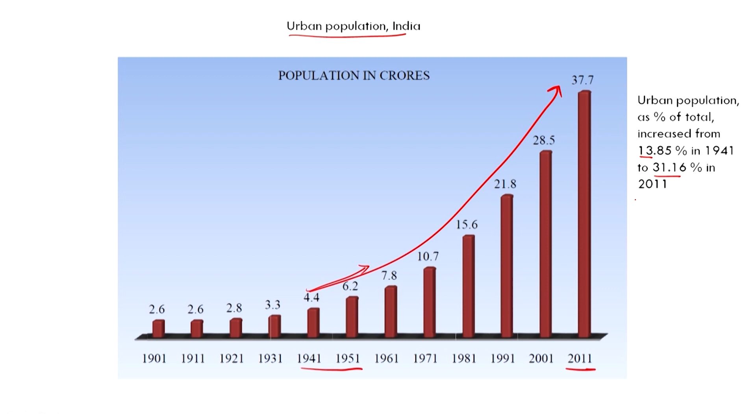So we see that it's a burgeoning urban population. Urban population as percentage of total increased from 13% to 31%. That's in 2011, and I think now in 2020 it will be much higher. As you can see, it's an exponential increase here.

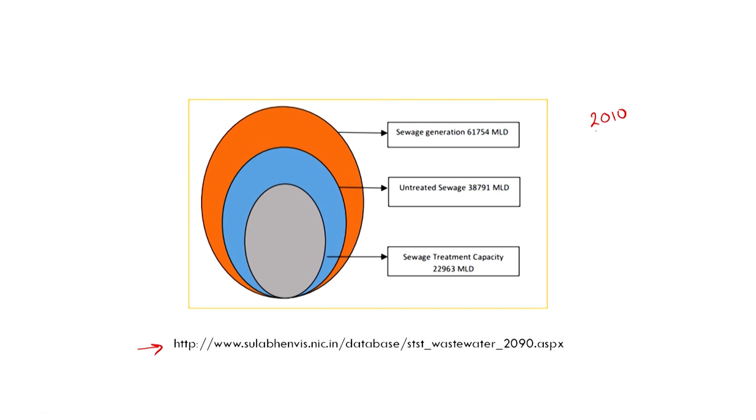Okay, let us look at the sewage characteristics. This is the relevant link, but I think this is from around 2010. So what do we have? Sewage generated is 61,000 MLD, or let us round it off, 62,000 million liters per day. And how much are we treating? We are only treating 23,000 million liters per day. Keep in mind this treatment is typically relatively poor.

Let us not go into the petty details now, but as you see, a huge percentage is not being treated, and obviously it is wreaking havoc with our water systems, both groundwater and surface water bodies. So that is what we have.

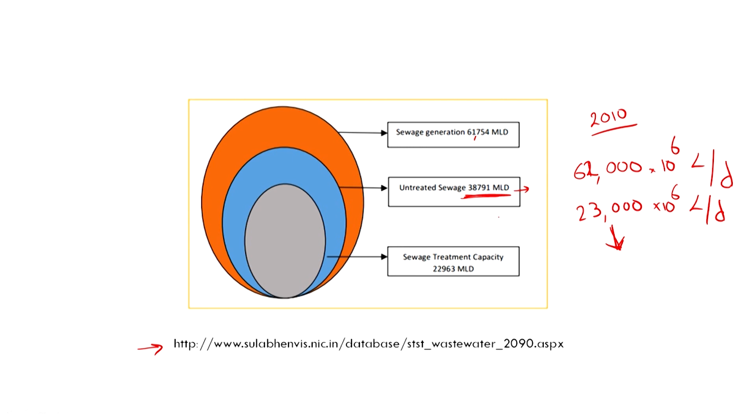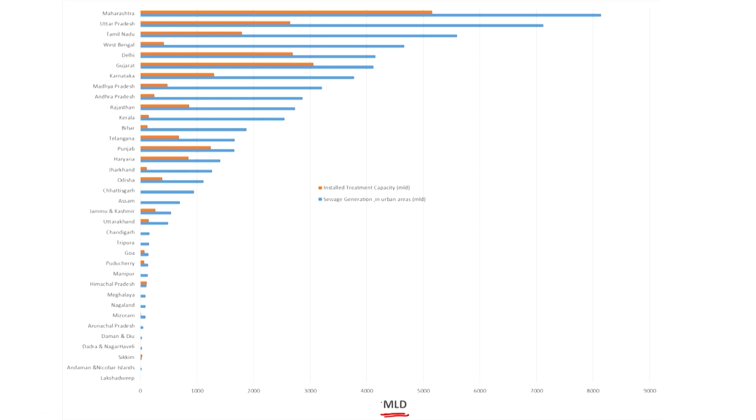Let us look at the bigger picture once. All this is from government data, I think late 2010 data, I do not have the latest data. We just played around with it in Excel. We have million liters per day on the x axis, and on the y axis different states, with respect to sewage generation and installed capacity.

Sewage generation: Maharashtra is generating a lot of sewage, relatively more wealthier population. I should have also had the population here, but though Uttar Pradesh is the most populous state in India, we see that it is the second highest producer of sewage. Keep in mind that the data here is not always reliable to a great extent, but you can capture the bigger picture.

But you can see that a greater level of sewage is being treated in Maharashtra compared to Uttar Pradesh, and we see the trends here with respect to Tamil Nadu and West Bengal, almost little to none. Delhi, maybe 70% or 80% is being treated, and Gujarat I guess relatively higher.

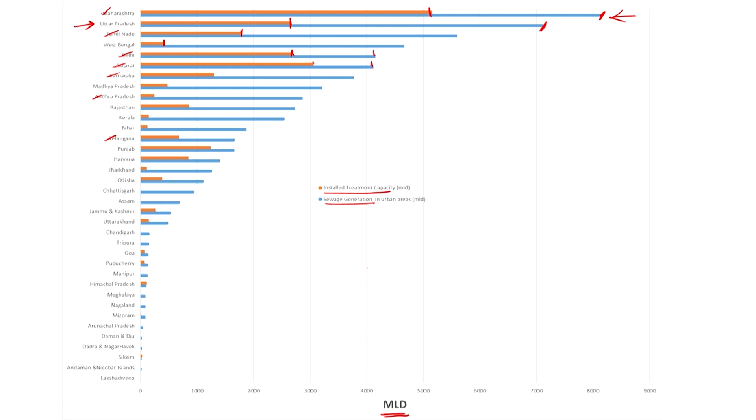But again the picture is that most of our sewage, even in those states that we think of as being relatively more developed, we see that the sewage treatment is pretty low, or sometimes it is abysmal. There are different issues, but we just want to get the bigger picture.

We do not have enough employment in the rural areas, so more and more people throng the urban areas where the infrastructure is heaving. So that is what we have out here.

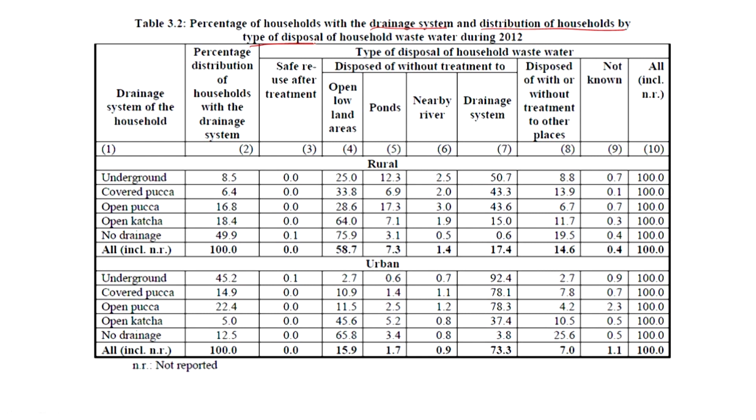And again government data with respect to households with drainage system and distribution of households by the type of disposal of wastewater. Just an overview: one is rural, and we see that 50% have no drainage. With respect to type of disposal of household wastewater, 58% is being sent into open lowland areas, and depending upon the concentration of BOD and COD, the groundwater, the soil and such will be polluted considerably. So that is something to keep in mind.

In urban areas, 45% is underground, and no drainage is relatively less. With respect to type of disposal, while there is a drainage system and it is not being disposed onto land, it is not clear to me whether it is being treated or not. So that is something to keep in mind.

But keep in mind that we are talking about percentages here, and the concentrations and the volumes are going to be remarkably high in the urban areas. Why I say this is we talk about river cleanups, and if you have no drainage collection systems or sewage collection systems in the first place, the sewerage system as we call it, and all this waste goes to the rivers or surface water bodies through multiple channels, you can't really treat the river.

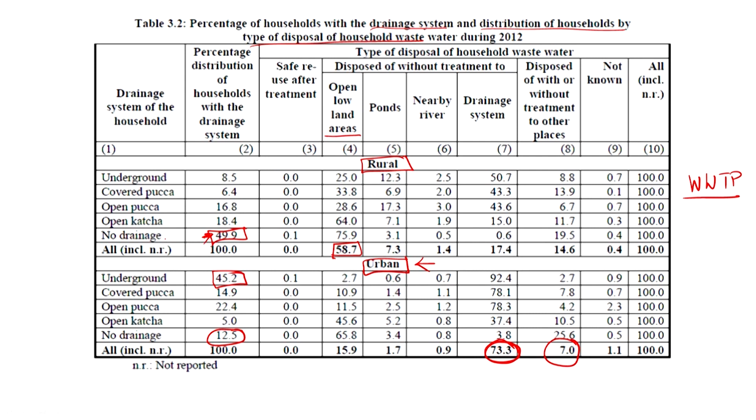So you have to have a collection system, and then a treatment plant, and then treat this water and discharge it. So now you understand the issues. One is not just the lack of wastewater treatment plants, but more importantly the lack of drainage facilities, or the sewerage system.

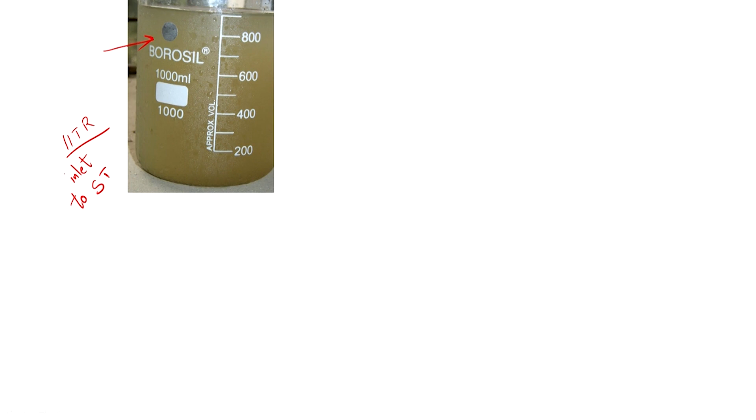And typical sewage, this is a picture of the inlet to the STP. STP means sewage treatment plant, and this is what we want to treat it to. From the background this is not from IIT Roorkee, but the one in Haridwar. We will look at the pictures from IIT Roorkee later. So this is what your untreated water looks like.

So what we want to do is prevent this. If you dump such organic load, DO is going to fall big time, and your BOD levels are going to be very high for quite a stretch. You do not want to have this level of ecological death out there.

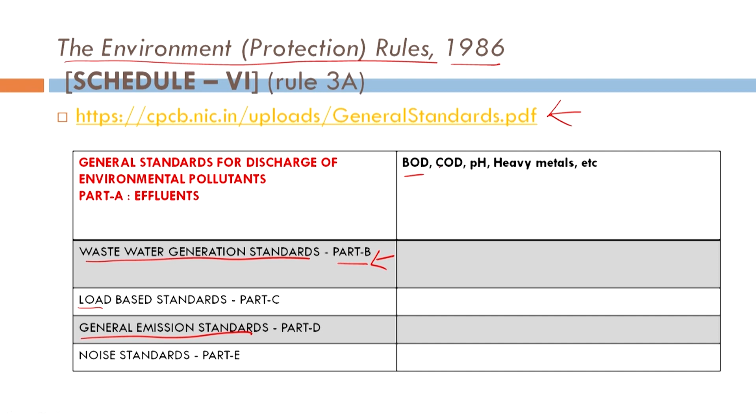So, let us see what we have. Typically we are concerned with the Environment Protection Rules of 1986, different amendments and such. So, I guess you can look at the general standards out here. So, what do we have? General standards are given for wastewater generation in part B, load based, general emission standards and noise standards and such. We are concerned with this. There are different standards for BOD, COD, pH, heavy metals and so on and so forth, which we will not look at, but you can, I guess.

So, wastewater contaminants, we are not going to look at X, Y, Z and let us say all the 10,000 or 30,000 compounds that we are concerned about, but we are generally concerned about some major aspects or variables, if I may say so. I am concerned about suspended solids. Suspended, as the name indicates, it is not dissolved, it is suspended in the solution, let us say. They can cause sludge deposits and anaerobic conditions in the environment.

So, for example, after some time they can settle down, right, and once they settle down, no access to oxygen, let us say in the interior parts, and so anaerobic conditions, putrid smells, and again with respect to pathogenic activity and such, right, and again no life typically that is useful to us anyway.

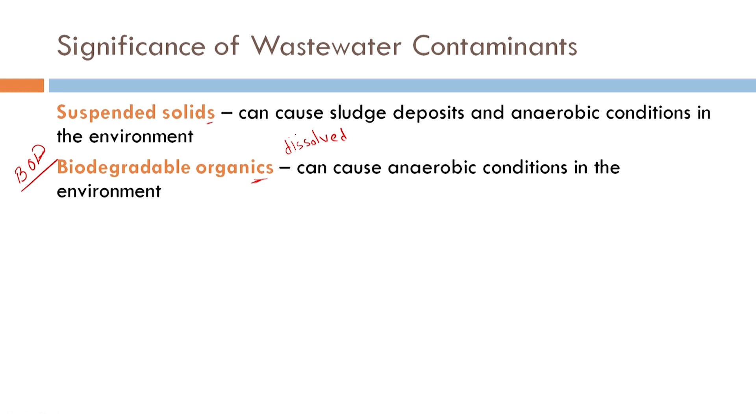And we also have biodegradable organics, which we are measuring by BOD, right. They can also cause anaerobic conditions in the environment. Biodegradable organics are present in suspended solids, but mostly in the dissolved form. What happens is that the microbes can degrade them in the presence of oxygen, thereby decreasing the oxygen levels.

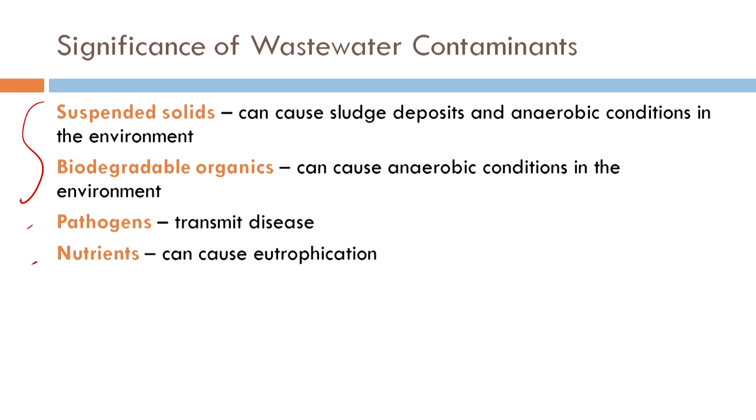So, you do not want to release that, and obviously pathogens from human feces or urine, and they obviously can cause diseases. And as we saw, I think 30% of infant deaths are due to such waterborne diseases, and nutrients which can cause eutrophication, right. So, hopefully now you understood why we talked about TDS and TSS, BOD, COD, fecal and total coliform, and nitrogen and phosphorus, because in wastewater these are the variables that we are trying to control, let us say, right.

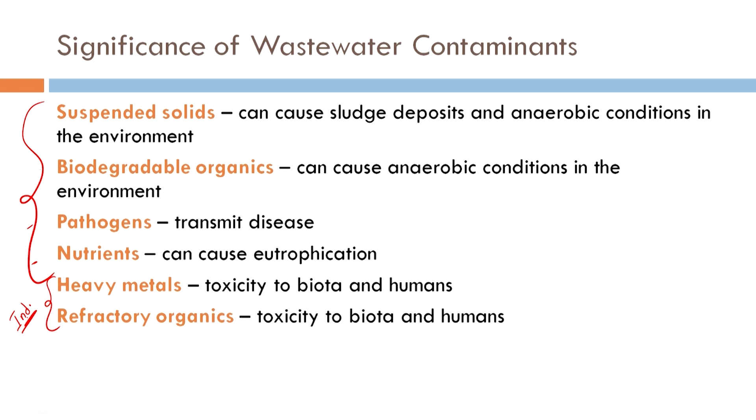Heavy metals, yes, but typically in sewage treatment plants we do not get that. Again, refractory organics and heavy metals are typically indicative of industrial activity or wastewater from industries, let us say, right. So, let us move on.

Characteristics of domestic wastewater. So, I am concerned with BOD, COD, suspended solids, total dissolved solids, and let us say nitrogen as N, and phosphorus. So, what do we have? Let us look at the medium value: BOD looks like around 200, COD is 500, but I would say it is a bit off. For domestic water, the ratio is typically more biodegradable. TDS around 500, and TKN, a measure of nitrogen, let us say 40, and phosphorus 10, which is relatively high out there.

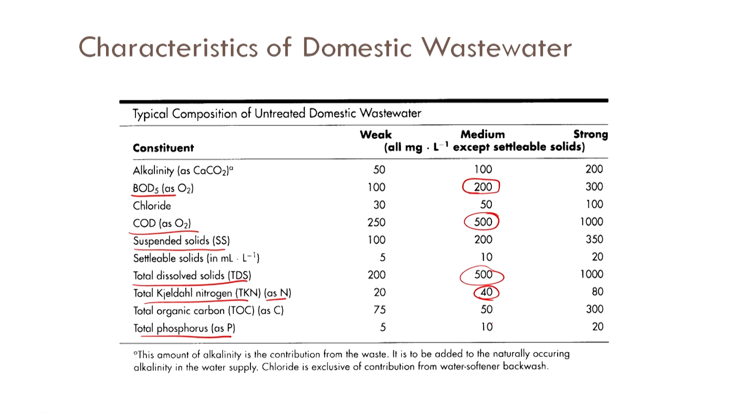Let us look at what it is at the inlet of the sewage treatment plant at IIT Roorkee. This is from 2019 as we see. So, pH again, once before the sewerage network, one after that. The issue is that before the sewerage network, you did not have a sewage collection system. So, your rainwater and such comes and mixes, you have dilution, you need to treat a larger volume of water, and also this water can go everywhere out there, right.

So, that is why you see that BOD when it was collected before 2016 was low, and when we had a sewerage network, and all the network now brings it to the STP, the sewage treatment plant, now we see a higher and more concentrated value, but the effective flow will be less, right.

So, that is one thing to keep in mind. It is not as if magically the BOD increased. So, 270 milligram per liter BOD, COD, suspended solids around 250, TDS we do not have data from this time, nitrogen, NH4 and NO3 minus, ammonia and nitrate, and phosphorus, and fecal coliform, I guess it is at that level. But what do we need to treat it to?

So, we need to bring it down to less than 10 BOD and less than 50 for COD. For nitrogen, I am not sure why I do not have the data, but for total nitrogen I guess it is 10, and phosphorus, as you see, we have to bring it down to 2, otherwise we are going to lead to eutrophication. And from a high of around 1 lakh, we want to bring the fecal coliform down to 100. So, that is what we have out here.

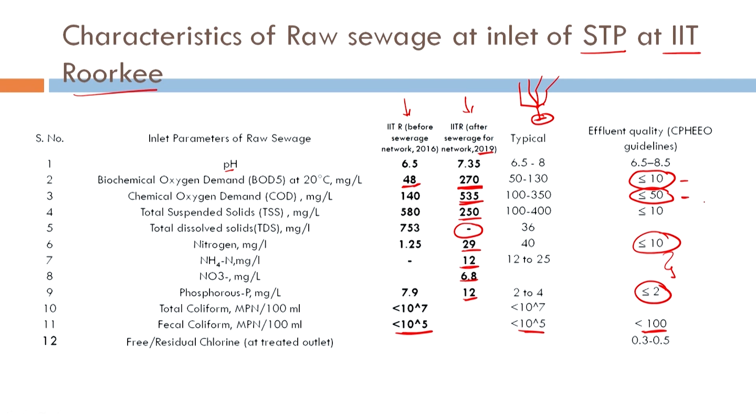Keep in mind that we want to achieve 10 BOD and 50 COD and around single digits of nitrogen and phosphorus. And typically in India, what do we have? We have septic systems which are disposal on site. Because we do not have a sewerage network or a centralized wastewater treatment system, on site disposal is required, and septic systems are most common now. They should be engineered, but they are not. Typically they are based on passed down knowledge.

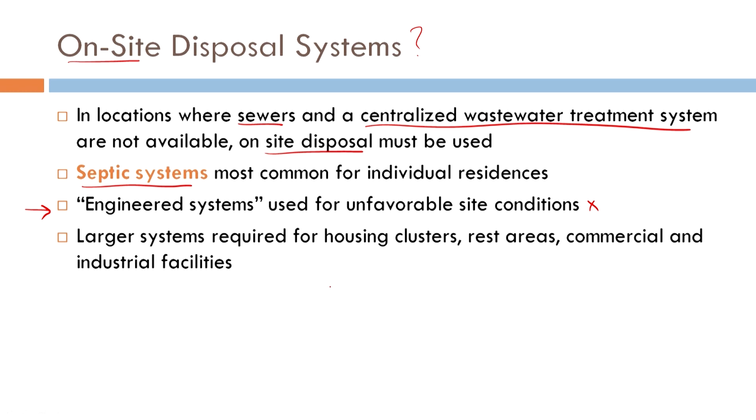Let us look at a typical system. Your wastewater is collected into your septic system, where it is treated anaerobically, because we are not providing any source of oxygen, as you can see here. And then the partially treated water will be distributed out here. But in India you do not have the space for this land. And this is let into drainage canals and such, again surface pollution and so on.

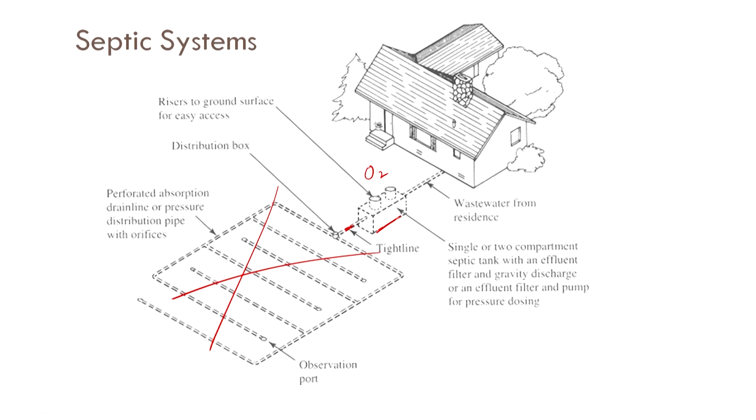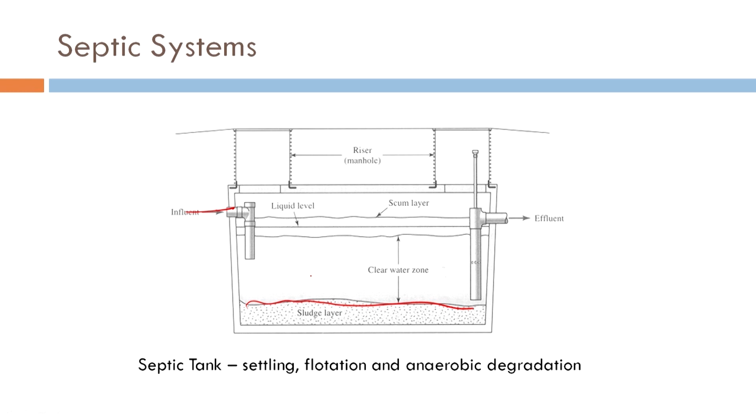You want to distribute it, it can be used for kitchen gardens, backyards and such, but we do not have the space in India. And with partially functioning septic tanks, we let out polluted wastewater into the environment. So, septic systems, what do you have? Influent, suspended solids settle down, relatively clear water, and then a scum layer at the top. What is happening here? We have settling, some flotation, and more importantly anaerobic digestion.

You have anaerobic bacteria, and the byproducts here are going to be methane or the reduced forms of carbon. And this is the reason we hear of deaths of people still engaged in manual scavenging. They go into manholes, the poor people, literally poor, because of historic issues, and they pass away. Why is that?

Anaerobic conditions persist in these septic systems. There will be no oxygen present, and you will have other gases which are toxic, like hydrogen sulfide, or methane, or other reduced forms of carbon. So, that is why you see people dying when they enter septic systems without proper breathing apparatus. So, let us move on.

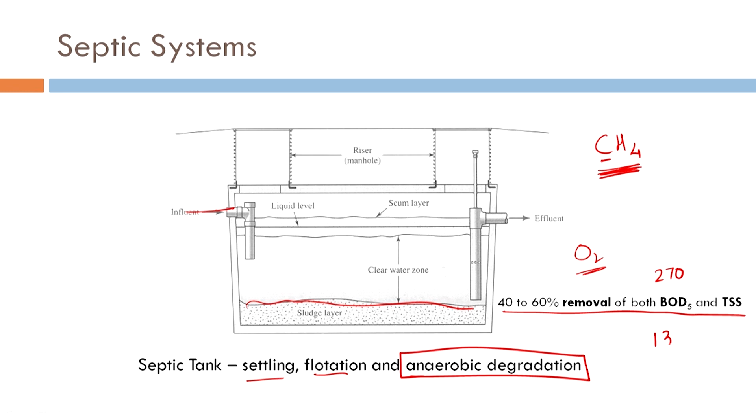Typically this is the issue: only 40 to 60% removal of BOD5 and TSS. For example, at 270, we are letting it out at 135 BOD, which is still remarkably high. That is something to keep in mind. So, if you have a centralized wastewater treatment plant, what are our contaminants of concern? Total suspended solids, dissolved organics in the form of BOD and COD, nitrogen and phosphorus, and then pathogens. For pathogens, you can either disinfect, or different processes will take care of them.

So, primary pre-treatment: people throw lots of stuff, glass water bottles, plastic and so on. You want pre-treatment to remove them. Bar racks, a grit chamber where you remove sand, and an equalization basin where you hold the wastewater for some time, so that the concentration in the outlet is relatively uniform.

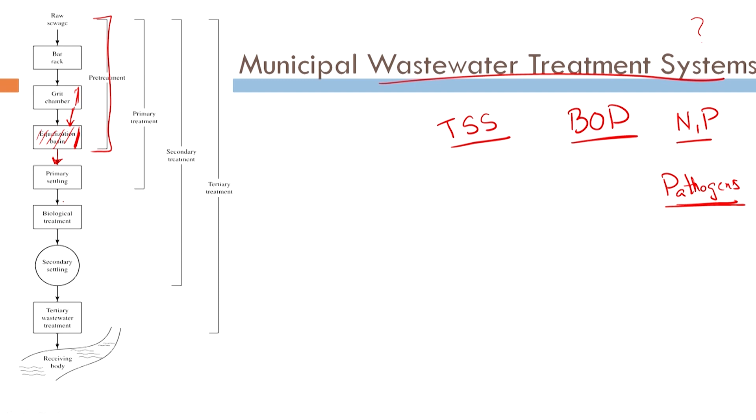Because in the morning you will have a lot of waste coming in, in the afternoon very little, in the night again more. So, the treatment process out here can't handle that variation, that is why you want to have an equalization basin. And then, as you know, if the particles are big enough to settle, you can settle them. So, that is why we call them primary treatment,

where typically we are trying to remove the suspended solids. When we talk about secondary treatment, we have something called biological treatment, and we are talking about BOD removal or dissolved organic content removal. And when we talk about tertiary treatment, we are talking about nitrogen and phosphorus removal, and sometimes disinfection for pathogens.

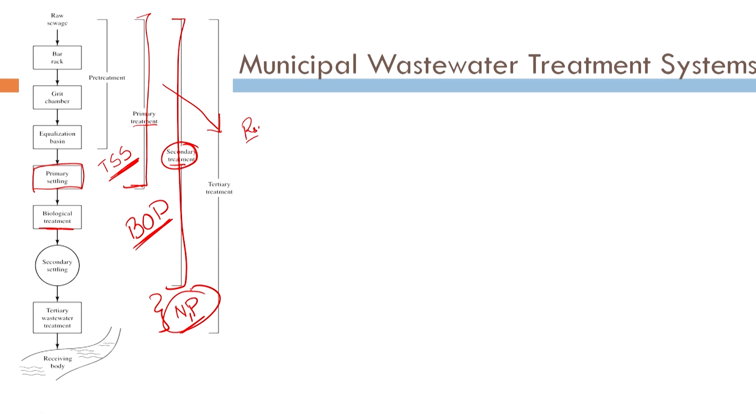Primary treatment for suspended solids, biological treatment for BOD, and tertiary treatment for nitrogen and phosphorus. Obviously, as you increase the level of treatment, the costs also increase. That is why in India typically we have only primary and secondary, and only a small fraction of the plants can remove nitrogen and phosphorus. I believe we already looked at this, let me not go into that.

Primary treatment removes 60% of solids, and in that process 35% of the organic content or BOD is also removed. But the primary aspect is removing the TSS. In secondary treatment, 85% of the BOD and solids is removed. And tertiary treatment removes any other remaining organics along with nitrogen and phosphorus and emerging contaminants, but they can't be degraded well though. So, that is something to keep in mind.

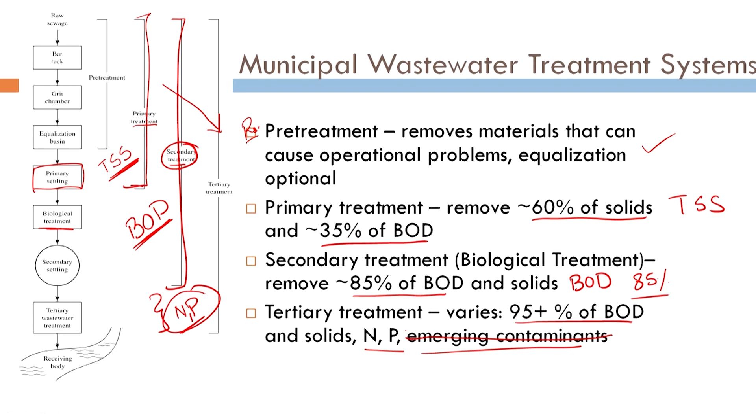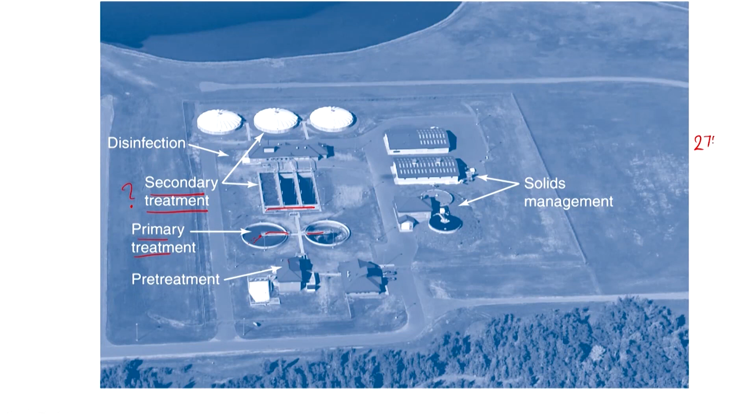So, what can you do? You can let nature do the job, as in microbes degrading the waste. But why will microbes want to do that? Because they also want to thrive, they want to use it for their cell synthesis and metabolic activities. But what do you need? For example, when BOD is 270 milligram per liter, dissolved oxygen in water maximum is only 8 or 9 milligram per liter.

So, what do you need to do? You need to aerate these tanks with oxygen, or with air which has oxygen, because oxygen is the electron acceptor and your waste is the electron donor. And this redox reaction will give out the energy required for the relevant microbes. And obviously, you will also need the microbes to let this reaction go faster.

And how will they do that? The enzymes that they release will get it done. And then after secondary treatment, you are going to have secondary settling tanks also, because the microbes, once they oxidize the waste, form flocs which can be removed, and then disinfection if you want to.

And as I mentioned, the flocs formed during secondary treatment will settle down, and that is why we need solids management. Otherwise, the sludge, if it is given directly to the farmers, is going to create its own issues.

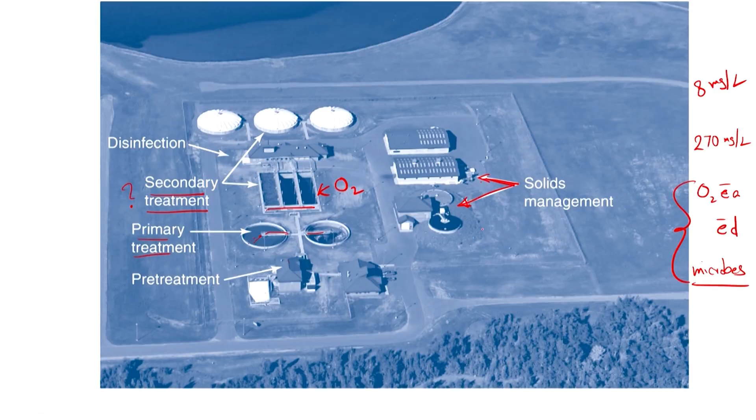So, that is an overview, and with this I will end today's session, thank you.